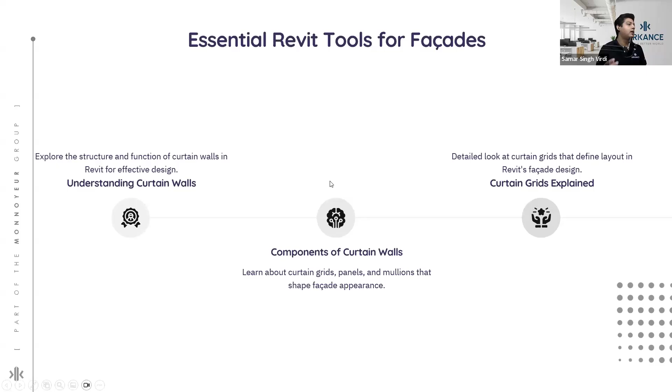And we can also have a detailed look at curtain grids that define the layout of the facade design. Other essential tools include panels and mullions. So the usage of both of them, understanding their role and how they can create a unique kind of a design. We have adaptive families in Revit as well. So adaptive families can be utilized to create versatile and dynamic facade elements.

Apart from adaptive families, we also have pattern based families. So these are pattern based surfaces that can be followed. We can create pattern based families that can be then applied to divided surfaces. Today we'll be going over this in a short demonstration as well. So exploring parametric modeling techniques. First is creating reusable and flexible panels. So there will be techniques to design panels adaptive to various projects, enhancing efficiency and versatility.

Dividing surfaces. So if you might know conceptual massing in Revit, you would know that we can divide a particular surface. Once we do that, we can easily use that divided surface to create complex forms. And finally, once we've used adaptive families, pattern based families, and done a divided surface, we can also control those patterns. So, strategies for managing and manipulating patterns within facade designs for aesthetic and functional benefits.

All right, so let's just go over some key design features of the Burj Khalifa. The architects are Skidmore, Owings, and Merrill. It is at a height of 828 meters above the metropolis of Dubai, and it is of course called the world's tallest building. It's a 162-story tower which combines local cultural influences with cutting-edge technology to achieve high performance in an extreme desert environment.

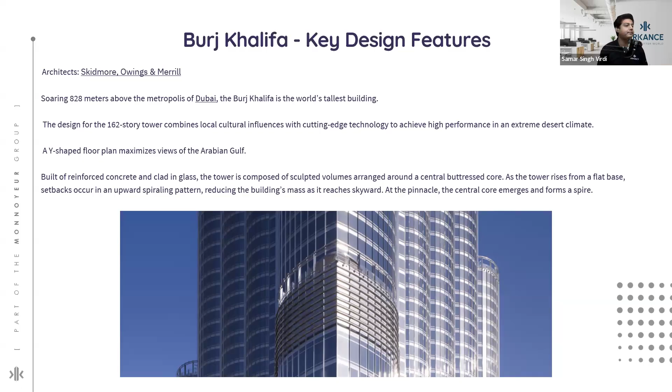So let's just look at the description that I've given in a 3D view. You can see the central core is going up and creating a spire, and we have this mass which is reducing till we reach the top. So the design inspiration is a certain desert flower which was the main source of inspiration for the planning. The tower is composed of three elements arranged around a central core. So you can see in this plan that here is a central core and we have three different wings from which the tower has been created.

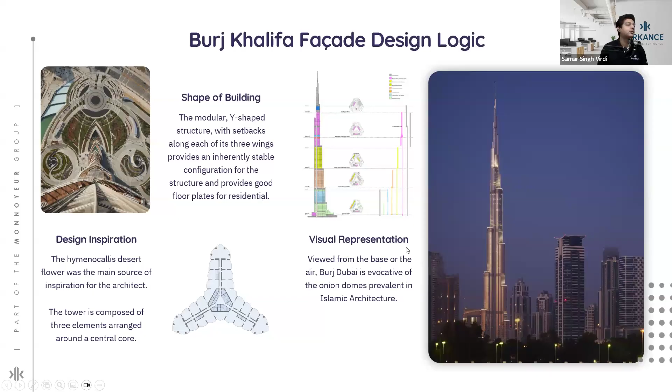The modular Y-shaped structure with setbacks along each of its three wings provides an inherently stable configuration for the structure and provides good floor plates for residential. Viewed from the base or the air, Burj Dubai is evocative of the onion domes also prevalent in Islamic architecture. These are some visual examples. So this is an aerial view. You can see the flower from which the plan was inspired. And this is a section comparing it to different buildings and towers throughout the world. And here you can see the particular 3D view.

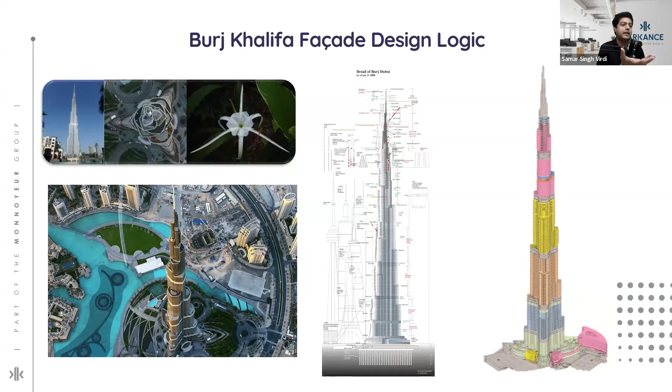Now you can see this particular color coding that has been done, and you will be able to notice that these colors actually signify the variation in the mass and the built form as we move upwards. So the lower base has more mass, and this pink part is reduced. So this is the exact strategy I'll be explaining to you within the software on how we can achieve this in Revit.

Before that, I would also like to talk a bit about other topics or tips that you might have to remember, especially for designing such structures. So enhancing model performance in Revit is also a great feature. Model performance can be optimized. So implementing advanced techniques to enhance Revit model performance for facade projects. Once we've created a model, we can easily optimize it, do some analysis and see what is working and what is not working. We also have effective scheduling because each and every component of the building is divided into an informative item tag. What we can do is we can use effective scheduling to actually create a good timeline which the project can follow.

Detailing is also very important, and Revit provides multiple annotation and documentation detailing features to do that for you. Techniques to enhance performance. Of course, once we've modeled the model, then we can use performance optimization to enhance the performance of our building. Impact of documentation. Again, if we've done the detailing, understanding how documentation impacts project workflow and overall facade design quality. Finally, we also have collaboration in facade projects. So fostering collaboration among teams to enhance the documentation and modeling of facades. This can be done through internal Revit based collaboration, or you could also use the Autodesk Cloud.

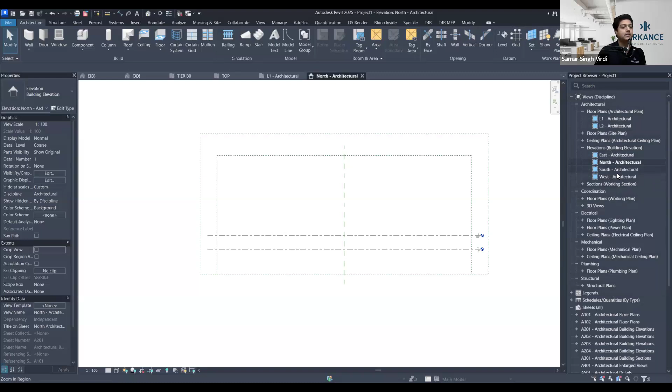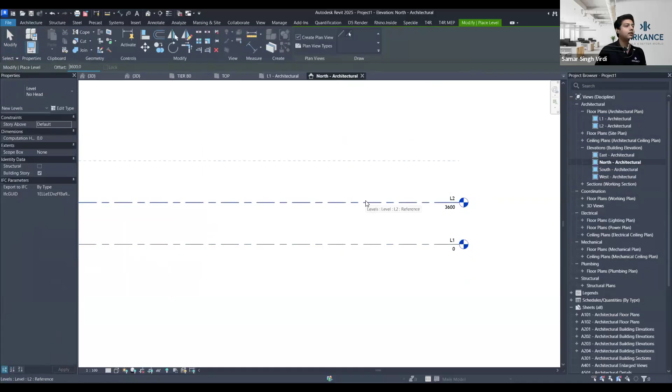On top is my command ribbon, which has all my commands. So commands according to the multi-disciplines that we have. And on the right, we have the project browser from where I can visit multiple views and sheets that I've created. All right. So right now we have L1 and L2 at a distance of 3600 mm. Let me just go to architecture tab, level, and create some levels. So 3600, and I am using the pick line tool to actually just click on the previous level to be able to create levels much easily.

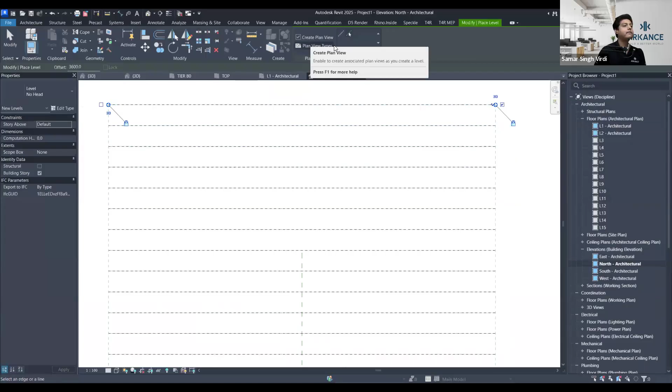So like this, I can just go ahead and start creating multiple levels. As you might be able to see on my right, the project browser is automatically adding the levels. So floor plans are automatically being added. This is because I have checked this on my command ribbon, create plan view. So like this, we have easily created about 15 levels. I think that would be enough for this example.

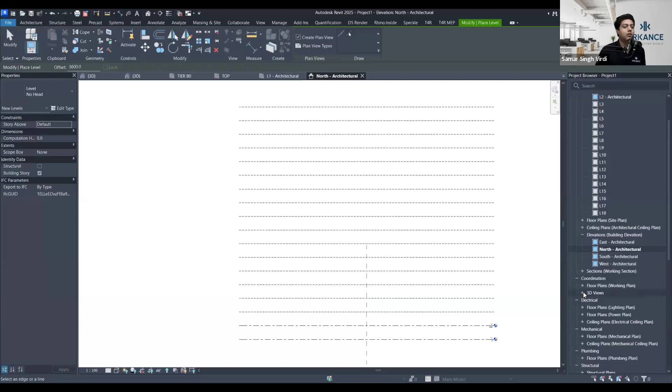Now what I can do is I can navigate to my 3D view, which again I'll do on my project browser. So I'll go to 3D view, 3D, and you can already see these levels. And to now create a mass and actually begin modeling a skyscraper, I will go to massing and site. And here I will click on in place mass. Revit will just give me a warning that it has enabled the show mass mode, which we of course want. So I will just close it and I can just name my mass. So I will just name it to building 1.

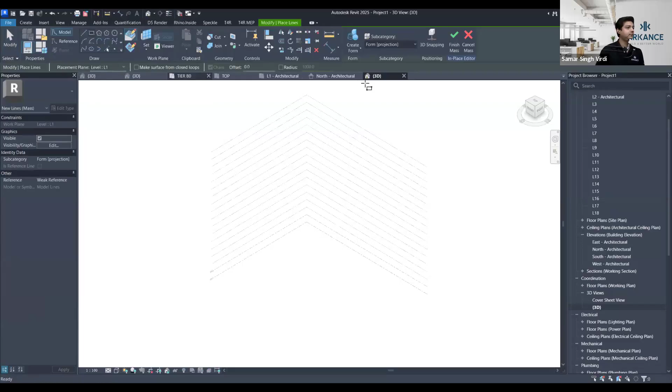And you see we have some modeling settings available here. What I will do is I will select a rectangle tool and make sure my placement plane is level 1. Next, I could also model within my 3D environment, but for accuracy, I can navigate to L1, which is my level 1, and place a rectangle here. So about 31 meters by 31 meters is good.

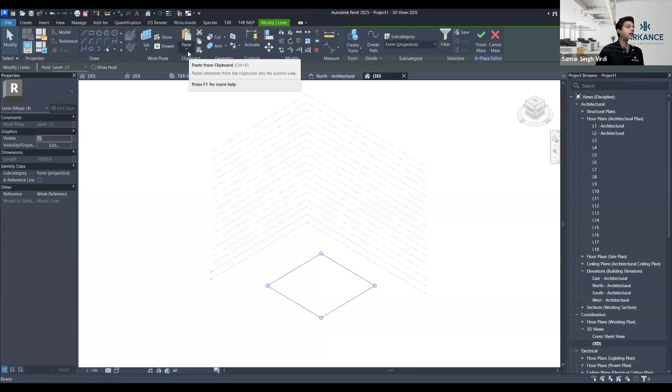You can see I have placed this particular rectangle. Next, what I can do is I can easily create more shapes on each of the levels, or I could also copy this shape. So let me just go to copy and then I will click the paste drop-down menu where I will select aligned to selected levels. By clicking this, I'll have this pop-up window which will ask me which level I want to copy this rectangle to. So that would be level 18. And you see the rectangle has been copied to the top level.

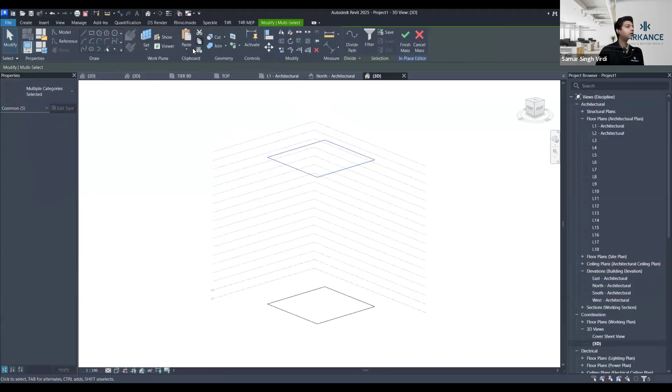Now what I will do is I will also create another copy. So again going to my clipboard in my command ribbon, I will align to selected levels and I will create the copy on level 10. But for level 10, I will actually use the rotate tool, which is in my command ribbon again. The shortcut for rotate is RO, and I will go ahead.

Let me just select the rectangle first. I will click on RO and I will now just rotate this to 45 degrees. As you can see, I can enter the value of 45 and it will be rotated to 45 degrees. So here is a double rectangle that was created. I will just delete this one. And you see, now we have three simple basic shapes that I've created.

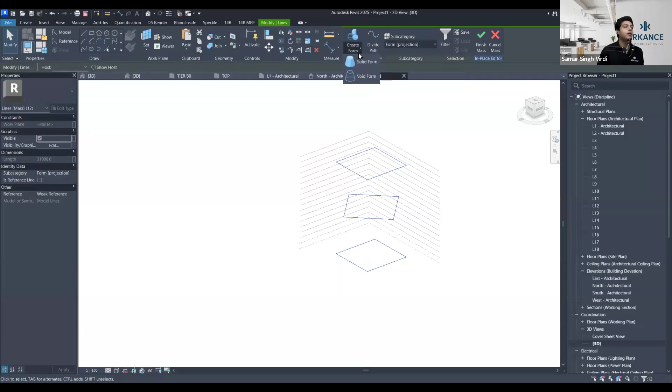And what I can do now is select each of these shapes and go ahead and click on create form. There are two types of form, solid form and void form. We currently need the solid form. So I will click on solid form, and as you can see, we have a very interesting geometry with us.

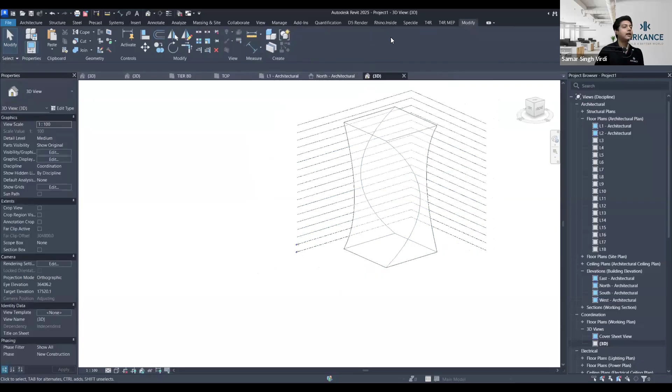Of course, when I'm modeling a building, I would follow the drawings and we would have a much more accurate building according to our requirements. But for now, let me just finish this mass. I clicked on the tick mark on the command ribbon, and now you can see I have this mass ready with me. Okay, so this is a conceptual mass, something like the geometry that we create in SketchUp.

Now, how do we actually convert this into a building? This is a great feature that Revit has. I can navigate to massing and site, and you can see I have all these settings under the model by face category. And very simply, I could choose whatever I want. So let's say first I want to create some floors.

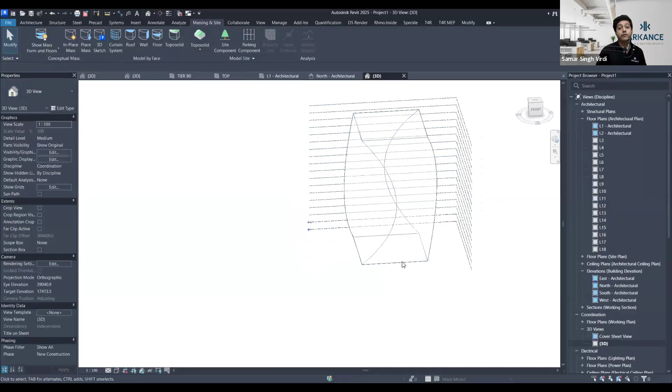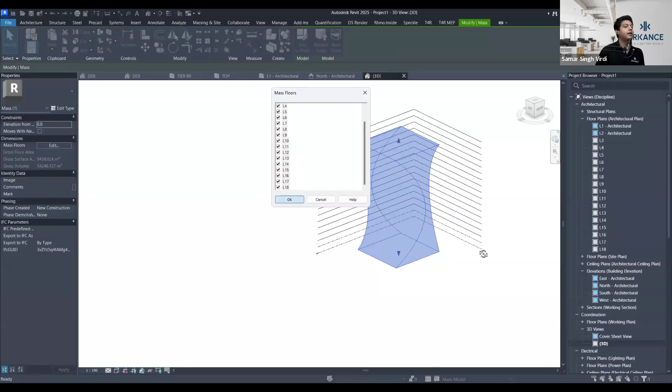I will select the mass and then I will go to mass floors. Whenever you click on a mass, you will get this option. I'll select mass floors, and then I will select each and every floor. So I've checked all the floors and I will click on OK. This will automatically create mass floors according to the geometry of the mass on each level.

Next, I can go to model by face in massing and site and click on floor. Now, very simply, I can choose these mass floors to actually convert them into a floor. You can see I have the generic 300 floor family loaded. This is okay for now. I could simply select them all and click on create floor. Now you see that a certain thickness has been added to each of the levels.

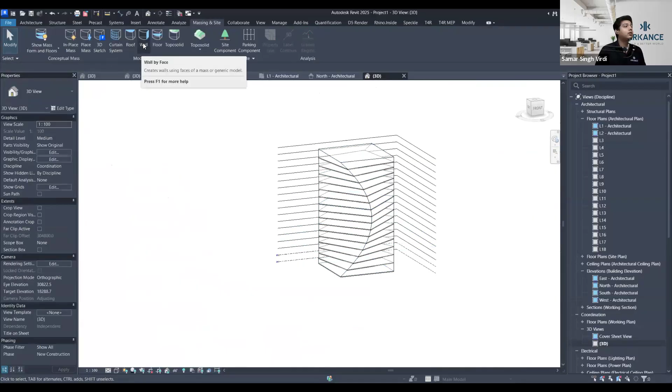Further, I could also add either a wall or a curtain system. Both have similar functionality, so let's just go ahead with the curtain system. Clicking on curtain system in massing and site model by face, I will now start selecting the surfaces that I want to create the curtain system on. Those would be the four sides of this facade. And let's say I have selected this building.

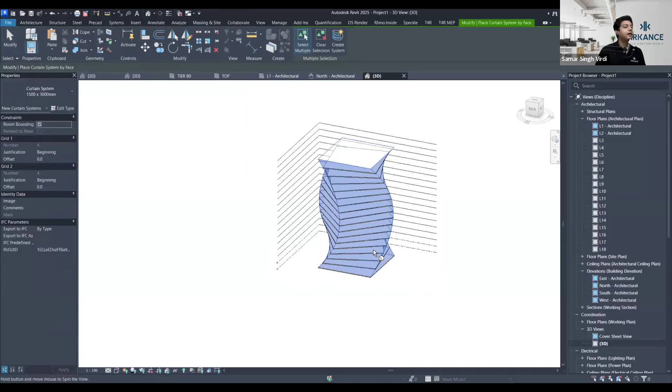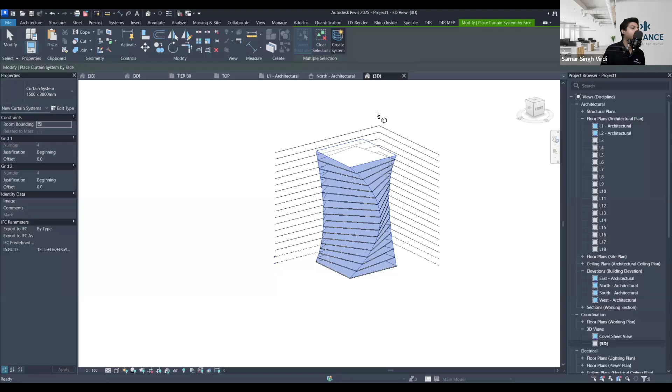And now maybe I could also change the settings. For the curtain system, I have one family loaded. I could change the justification and offset of grid 1 and grid 2. And now I will just click on create system. It will take a few seconds. And now you can see that Revit has actually converted that mass surface into a curtain system.

So now you might see it hardly took me any time to actually create a very simple conceptual massing and convert it into a building. I can also press Tab to select multiple objects. So I could select one system panel, or I could select the entire mass, or I could also select the floor. Further on, we can easily go ahead, create the changes that we want, maybe change the curtain system and change the types of panels that we require.

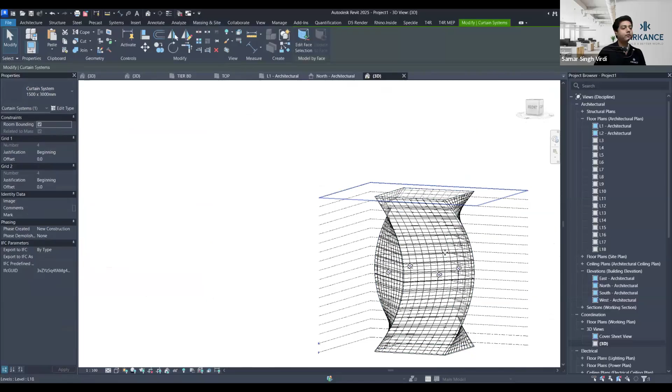Let me just navigate to a level, and you can see we have this level with all the detailing in plan view as well. So this was a very basic introduction to advanced massing actually. And this I wanted to present particularly so that you can understand what we've done in the Burj Khalifa model. Let me just save this file.

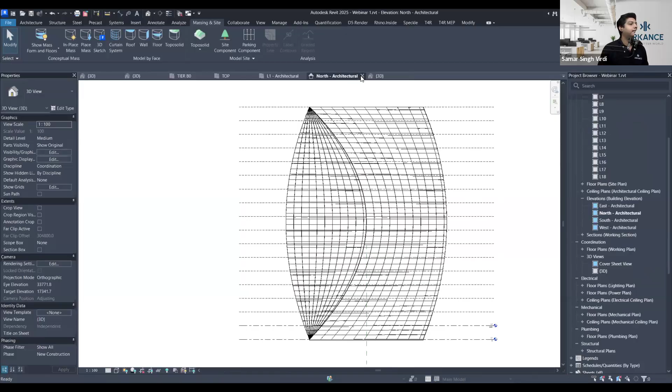All right. So now let's just move on to another demonstration, which will be actually of creating a parametric surface and adding pattern based geometry into that surface. So again, I will go to new, create project. I will choose the metric template. All right.

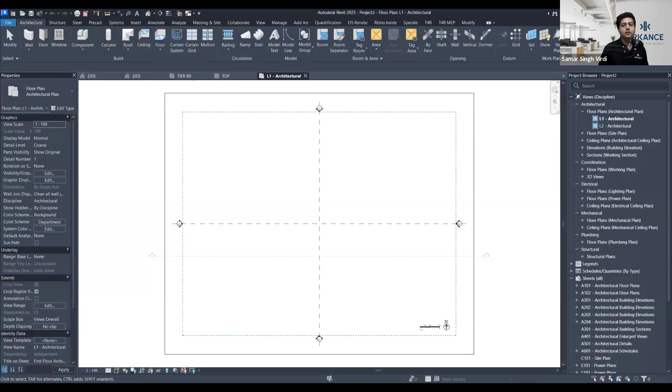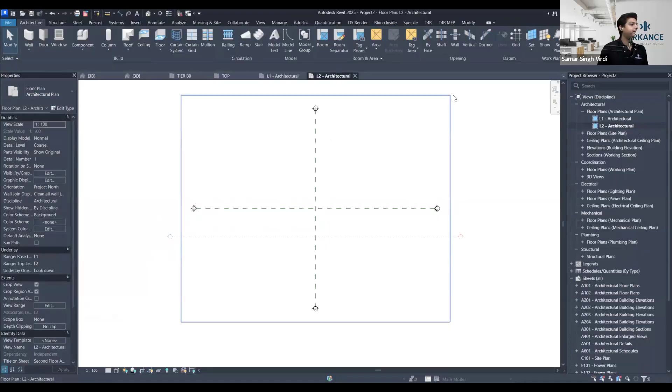Again, I don't want these extents. This is a new feature that has been added in Revit 2025, which is quite convenient. But for this example, I do not require this. So I will turn this off using extents in my properties tab. And I will also delete these scope boxes. I will navigate to level 2. Here also I will repeat the same. Yeah.

So that was one way of creating a mass. Let me now show you another way. I will again go to massing and site, in place mass, and just name the mass whatever I want. And now instead of using a rectangle or any other shape, I will actually use this point element. Point elements are quite useful. You'll understand now in just a few minutes. What I did is I just selected the point element and I have started placing these points onto my level 2.

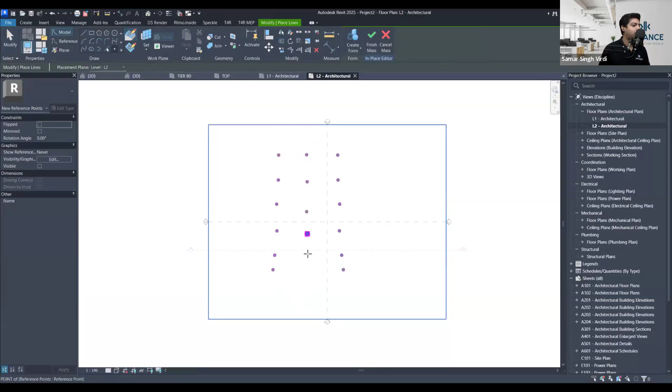All right, so I have created a sort of an imperfect line. Let me just mirror this onto the other side. Mirror again, I'm using the command MM to select. And let me just create a middle as well. So this can be done precisely as well. Maybe I just want one point and then I could copy and use ortho to do a precise placement of these points. But right now for this example, we do not require that precise modeling.

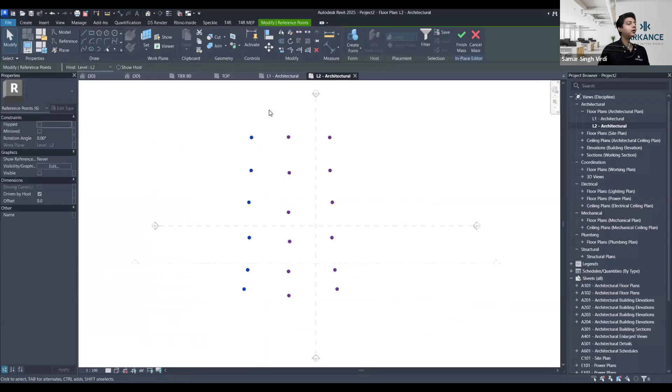All right, so once we've placed these points, I will now connect them using the spline tool. And make sure that when we are connecting, I will actually just connect these particular lines vertically. So I've selected the left hand side. I will go ahead and click on spline through points. This will create a line for me. I will repeat this. So here and here as well.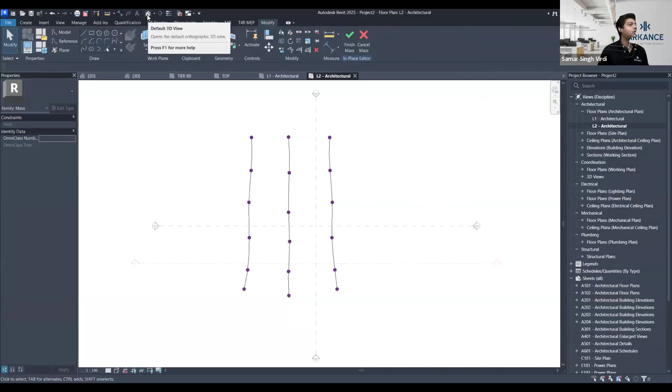Let me just navigate to my 3D view. I could navigate using the project browser, or I could also go ahead, click on this house icon on top in the quick access bar and open up my 3D view. So yes, I've modeled it correctly. We have straight lines. Now, before actually converting this into a mass, I will also convert this into a reference line. That is actually useful because it converts the line into planes that we can further work on.

So to convert this into a reference line, I will do nothing but just go to properties and click on reference line. So I just take the reference line and you can see two planes have been added on both of the ends. Similarly, I will do for the other lines. And now I can select all of these and go ahead and create a solid form.

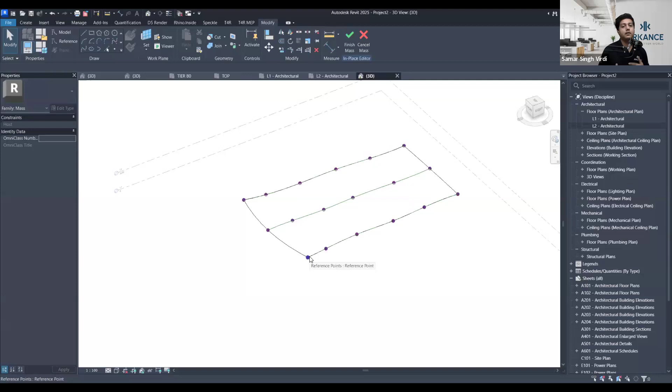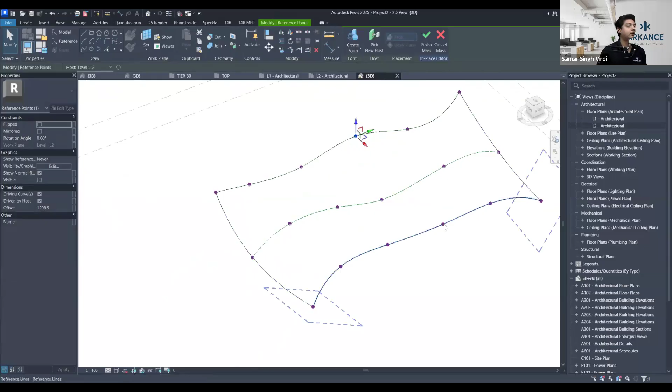So if I had not made these into reference lines, these points wouldn't have been available to me to manipulate further. But now I can easily select one point and actually just manipulate their position on, say, the Z axis and actually create something interesting. So let's say I want a complicated surface, something like this. All right. So I think this is enough for one example.

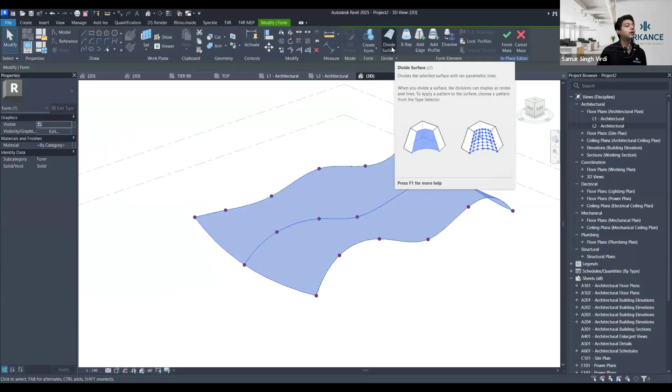Next, what I will do is I will select the surface. So how did I do that? I clicked on the edge of the surface and you can see here it says divide surface. For that, the shortcut is 2 times forward slash. So clicking on divide surface, it will actually use the surface geometry to divide it into a grid. But I will not stop here.

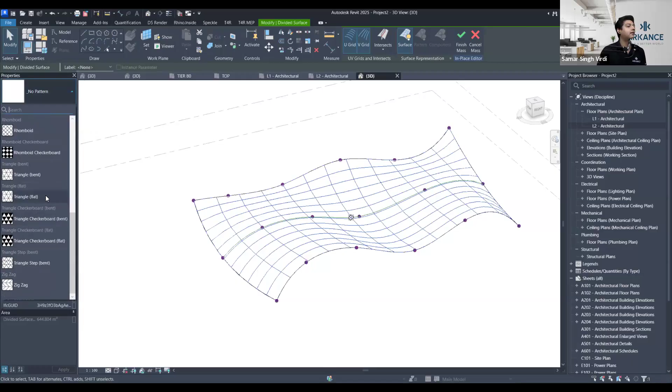I will also adjust the pattern of this surface. So right now, as it says on the left hand side in my properties tab, it says no pattern. What I will do is I will go ahead and I could choose any of the patterns that I want. But right now I will choose this triangle flat pattern. So you see the surface has been divided into triangles.

We also have some other functionalities in my properties tab. So you can see the U grid and the V grid, which are the vertical and the horizontal axis for this surface. I will change this fixed number to, let's say, fixed distance, and I will change the V grid as well to fixed distance, and the distance I will provide as 900.

Clicking on apply will actually change the surface for me. Now you see we have much smaller triangles going throughout the surface. So now I can easily click on finish mass and this has been created.

But right now, this is again just a conceptual mass like we studied in the previous example. How to actually give it some 3D geometry? To do that, I will now create an adaptive family, an adaptive pattern based family. So let me just go to file, new, and I will click on family instead of project this time.

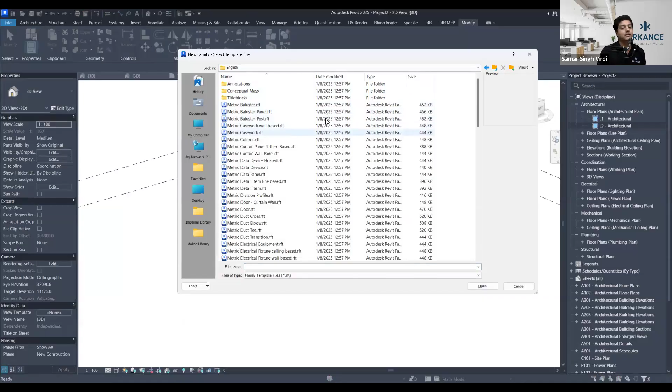Here I have my Revit library, which has a lot of templates that we can work on. But let me just navigate to metric instead of imperial. And here you can see we have door, we have furniture, but right now what we require is metric generic model pattern based. So this is what I will open and this will give me this particular template.

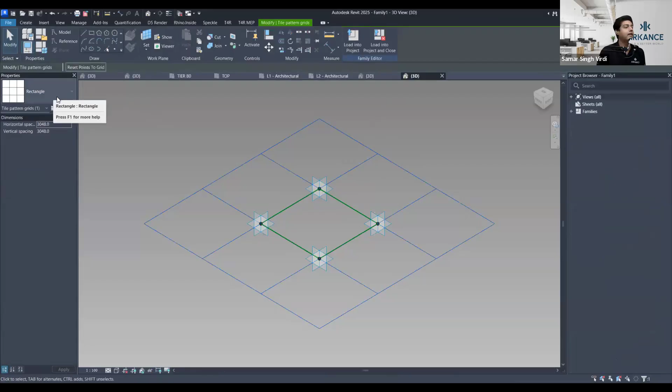Now to change the pattern of this template, I can simply click on this blue line grid, and on the left hand side, again, I will have the properties tab. Here I can go to my triangle, which I've used. And now you can see we have reference lines, we have points already placed with us, which are adaptive points. So adaptive points will basically adapt to whatever points are available on the surface. This is what makes this geometry adaptive.

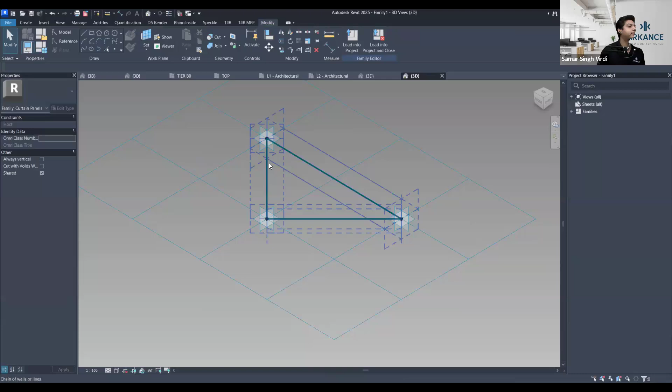Let me now just create a 3D geometry using the sweep tool. So for that, I will again use a point element. I will place this point element anywhere on these green lines, which are my reference lines. So let's say I want to place it here, and you can see after selecting the point, I have a particular plane on which I can draw.

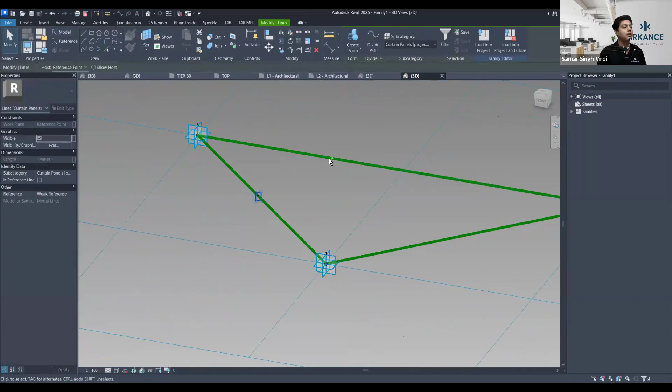On this plane, I will go ahead and choose rectangle and easily just draw a rectangle. Of course, precise dimensions can be followed once you're actually working on a project. And now I will select this rectangle, and by holding control, I will also select these reference lines. Next, I will go to create form and click on solid form. So you can see that it has created a frame for me.

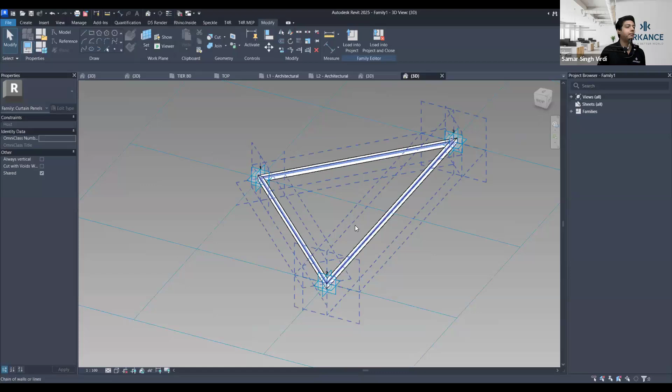Similarly, we could add maybe a glass panel between this. So I can choose maybe a surface. How did I do this? I just selected the reference lines and created a form again. And for the material, I selected this surface, went to my properties tab, and I have the material option. So here I can just use glass. All right, I think, yes, it has been selected.

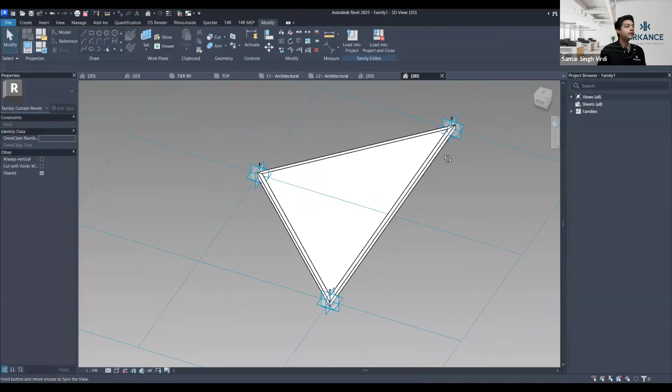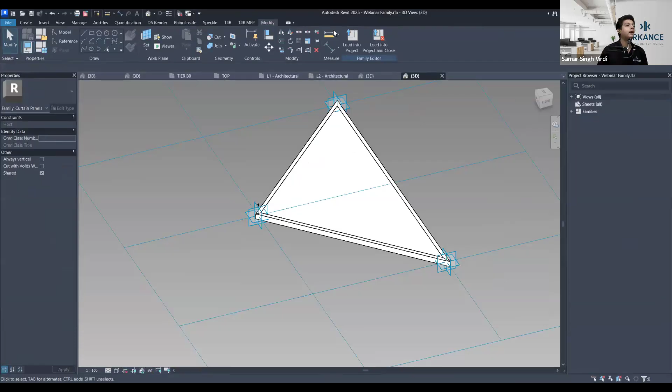Now to actually take this particular family into my project, which is this surface project, first let me just save this file. So I will name it as... If we have the project and the family open in Revit, I can just click on load into project and it will show me the projects that I have open. So I will just click on project 2 and the family will be very easily imported into the project. So this is one way. The second way is you can save the file and import it later using the insert tool.

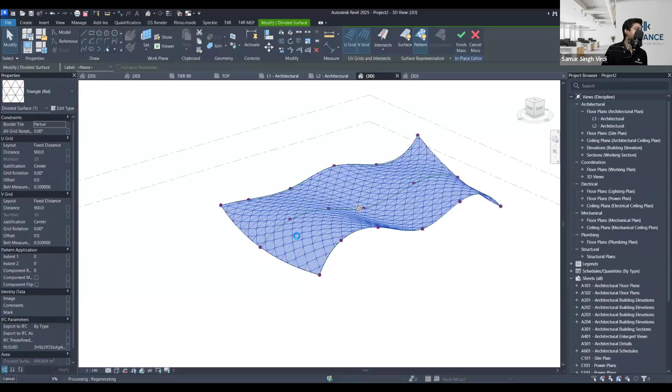So now I can go ahead, double click on the mass, then select the surface. Now going to my pattern, I can simply go to the drop down and choose this webinar family. By clicking on this, it will take not minutes actually, I think 30-40 seconds to generate that webinar family onto my surface. Yes. So now you can see the particular geometry has been added to the surface. I can click on finish mass.

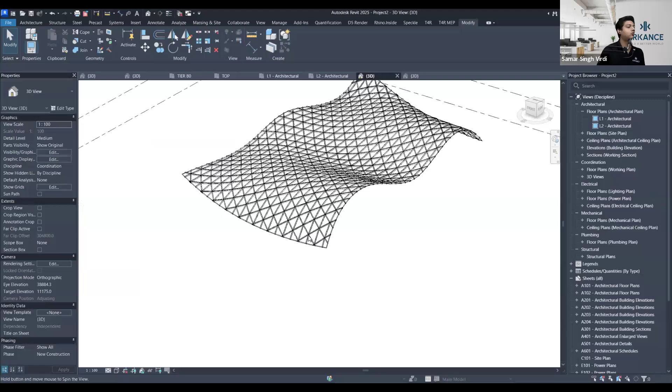And you see that we have a very parametric surface available to us. This can be used in roof structures or whatever kind of geometry you want. We also have some additional settings. All these are covered extensively in the training sessions and courses that we undertake.

So you can see right now I have border tile as partial. If I want this to be complete and not cutting this geometry, I could choose empty instead of partial, or I could also choose overhanging. So empty will actually just delete these edges and give me just clean triangles. I'm so sorry.

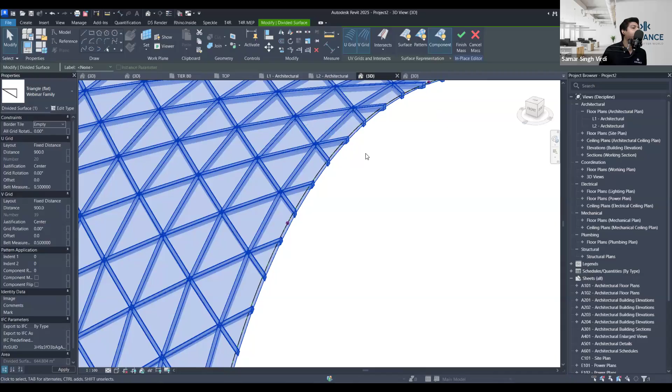Yes. So you see, this was one example. Now, why did I show you these examples? This is to make you understand and give you a bit of clarity that you can create masses of any skyscraper that you want, divide that surface, and then add whatever pattern-based family that you require to create complex facades. This is right now horizontal, but of course the same thing can be done vertically as well. And a great comprehensive facade can be made.

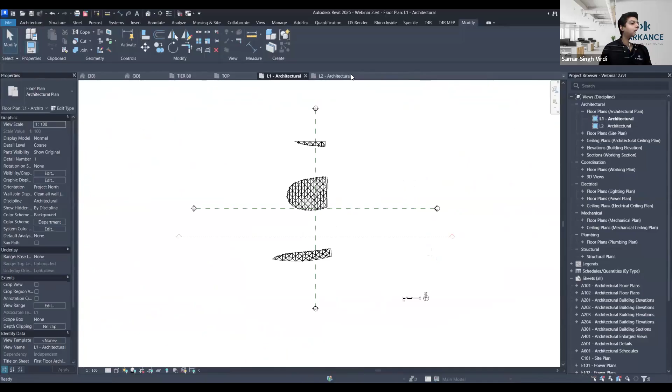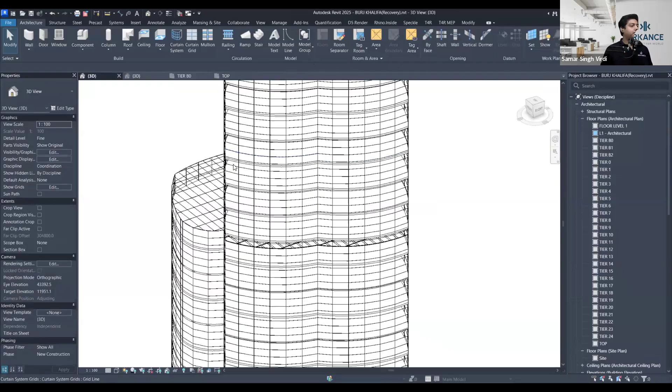I'll just save this file as well. All right. So let's now get into the modeling of Burj Khalifa. I'll just navigate to a 3D file that I have opened. So this is the 3D model that has been developed within Revit. As you can see, when I zoom in, it has a curtain panel system all around. And of course, it follows the exact geometry and massing of the original building.

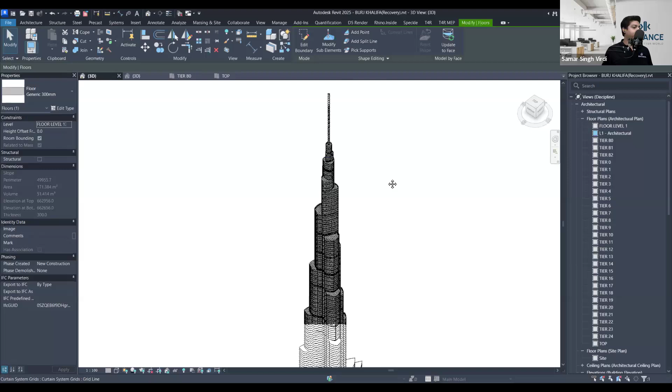And we also have different mass floors with us. So how did we approach this? We approached this using conceptual massing and then using model by face to convert that conceptual massing into a building geometry. Let me just break down and give you an example of how this can be approached. So first of all, I'll just navigate to my site plan and turn this on.

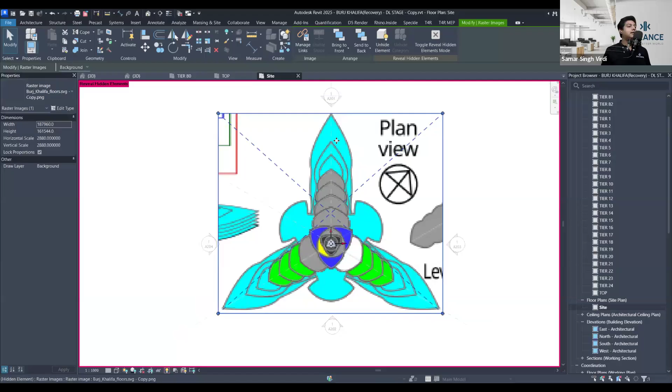I had imported this plan view, and this is actually a typical plan view that consists of the geometry of all floors within the Burj Khalifa. You can see this is the top and this light blue is the base. Next, I used detail line, which is here in the annotation tab. Of course, you first have to import this image and scale it according to the real scale of the building. Then we can use this detail line, the shortcut is DL, to start tracing upon this.

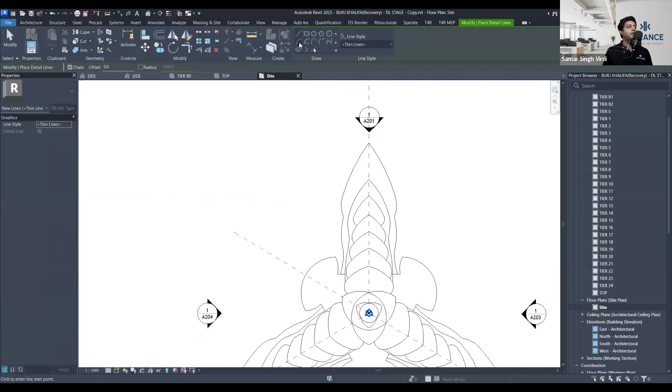Let me just turn this off and show you. This was the traced result, which I did on the site level, and you can see that this is exactly how the plan was. It didn't take me much time because this was just tracing. Let me navigate to Annotate, DL, and you can see we have these drawing tools here. The most used tool on this plan was this curve: start, end, radius arc. This was used a lot to create these geometries.

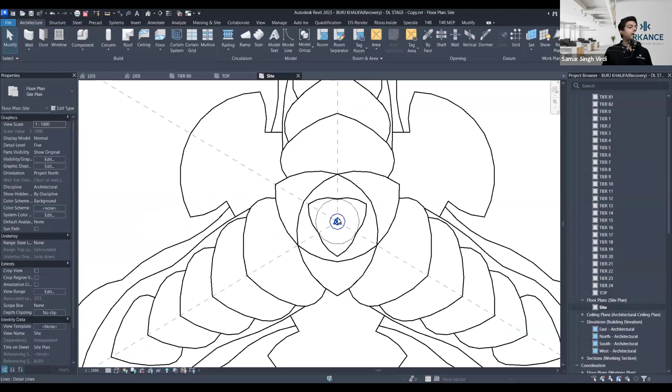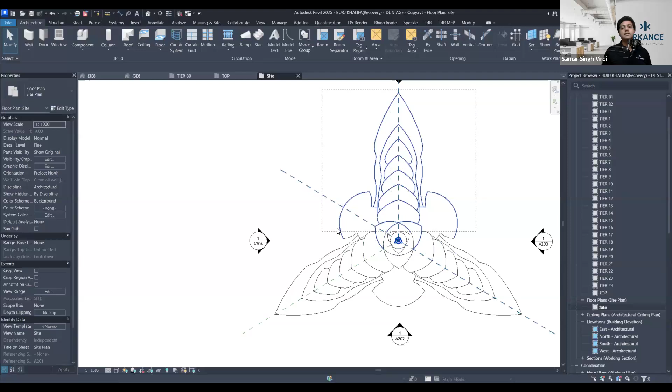Next, there was one more feature that I used in my architecture tab, which is reference plane. I created three reference planes at an angle of 120 degrees, and this one I just extended. I traced this particular part of the model, the one highlighted in blue. Then I used the mirror tool to mirror it on this side, and similarly I rotated it and mirrored it on this side, because this is highly symmetric. With this, I finished this particular geometry.

Now, I've skipped the basic parts, which is the setting of levels. Whenever you open a Revit file, it is important to set the levels. Even for this, when I opened the file, I went ahead to set the levels. I had imported a section view of the Burj Khalifa, and I created multiple levels as per the section I had downloaded. After doing this, I had all these floor plans available to me,

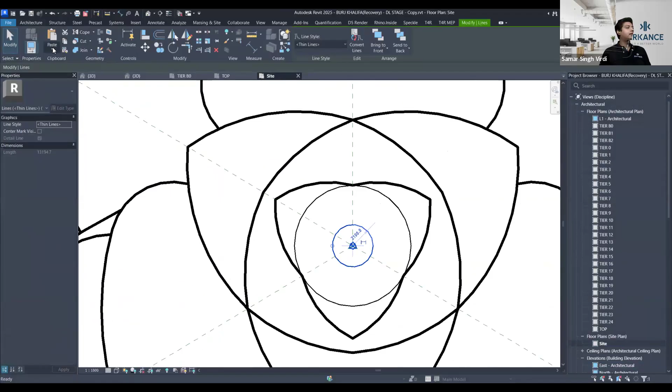and then I started to use these geometries on my site plan to copy. I selected the geometry, used copy, and then used Aligned to Current View, so I just pasted it onto my top. Similarly, I used these lines to start copying on each of the levels. Let me go ahead and show you.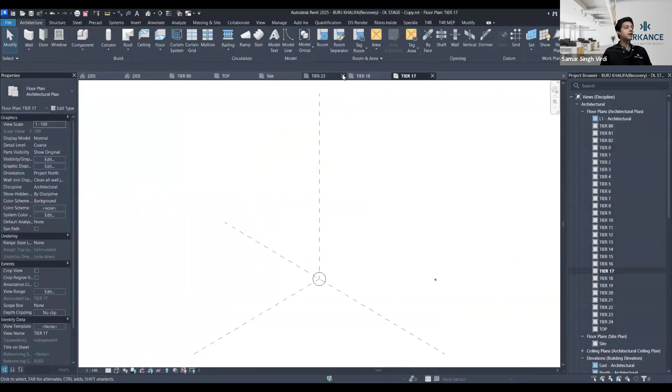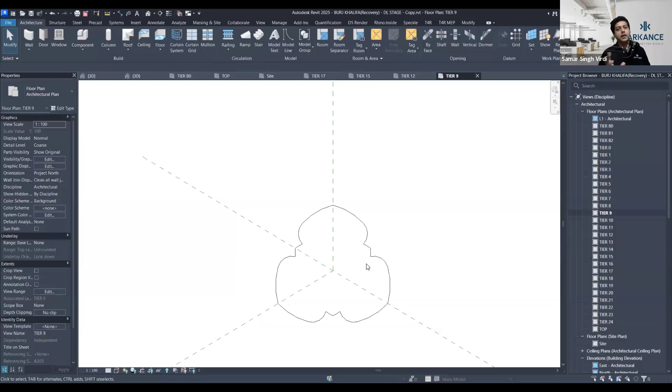Level 17. From the top till level 17, we just have this spire, so only two of these geometries were used. Then I went to level 15 and created this geometry. On level 12, I expanded it to this. Level 9, this. Of course, it took me a bit of time to understand and break down the geometry of the building, but once that was done, it became quite easy to use that site plan and keep adding these lines. So it might be on your mind: why am I actually doing this?

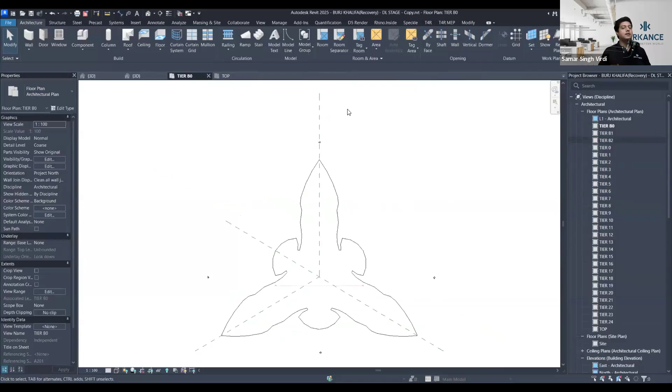So once we've actually added these lines, the next part was to, let me just close these tabs. The next part was to create forms just like we did in conceptual massing and start extruding them. So one example for that can be that I can choose the top, then I could go to Massing and Site, In-Place Mass, okay. And here I can use Pick Lines to use this particular circle. I can click on Create Form, and then you can see here I have this.

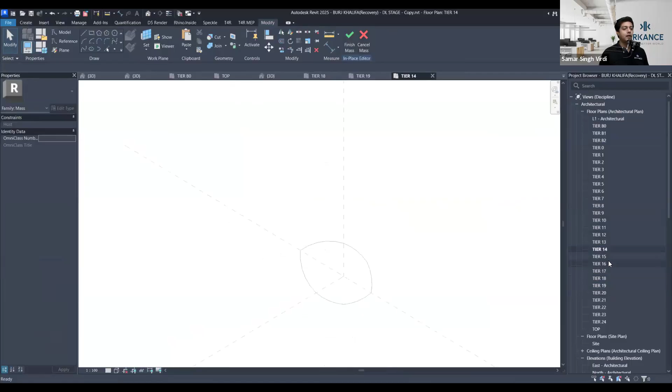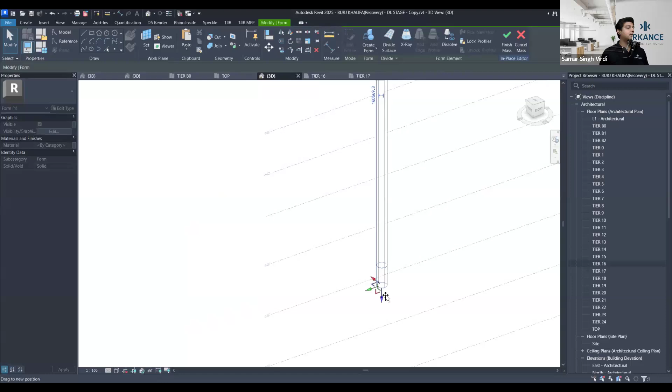So this particular geometry I then just extruded onto the level below. So this was, I think, level 18. So I extended this to level 18. Then I navigated to level 18 and I made sure that I do not finish mass, because all this is just one mass. That would actually help us to convert it into a building. Okay, I could navigate to level 16. I can extrude this as well to level 16. And you see, as I'm dragging it, it actually snaps to the particular levels.

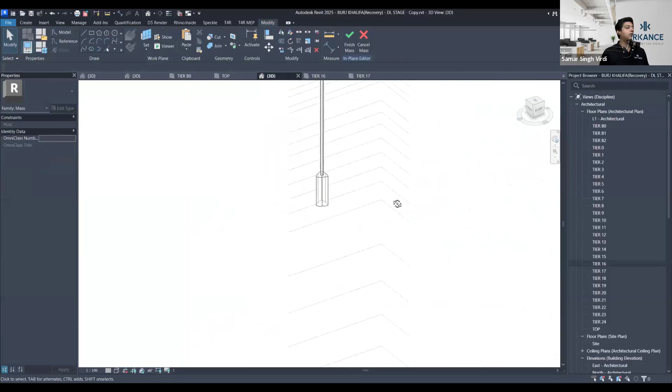So this is one. Then I used Pick Lines again, clicked on Tab to select all of these lines, and then again clicked on Create Form to have this geometry. This then I took over and extended it to the other level below it. And this was the top to bottom approach that I followed to actually just keep selecting these geometries and model my building. So this is level 14. I will again go to my 3D and I could do till this. So as you can see, slowly my form is being developed.

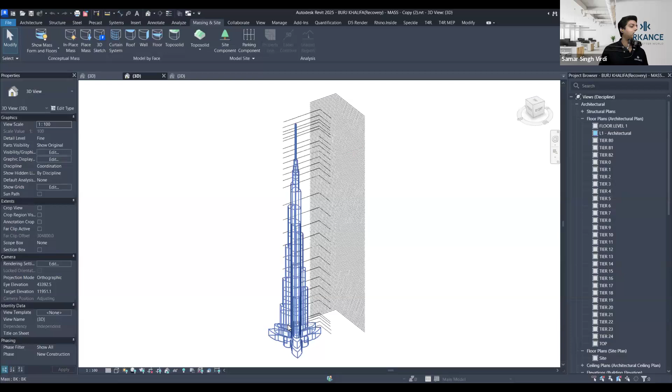So I used this particular method to actually achieve this mass. Let me just turn on the massing. So I'll go to Massing and Site, Show Mass. And now you can see I have this mass available with us. So the similar method I followed, going on each level and actually extruding it to the level below. This took a while because there were different levels. So let's say level 12, I extruded it to level 11 and so on.

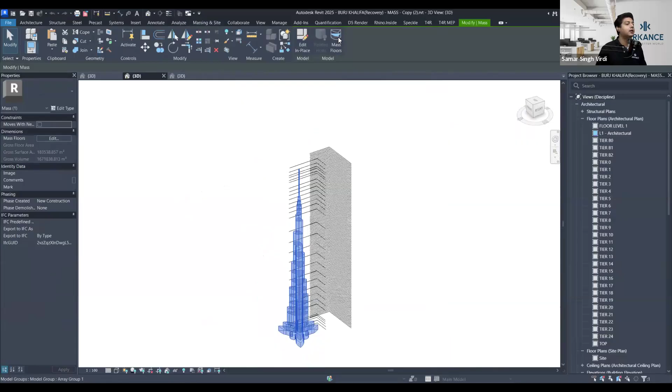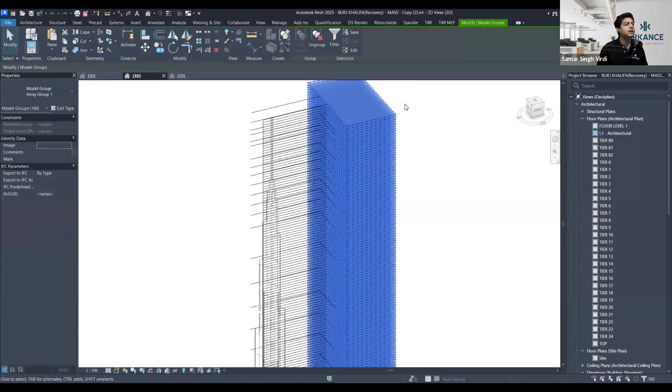Next, I used mass floors to convert this into a mass, and then I added 162 more levels after I had done mass floors to create the stories, because these were different levels. These were height levels that were used for the section, but I created another set of levels, total of 168, and those I used to create the mass floors.

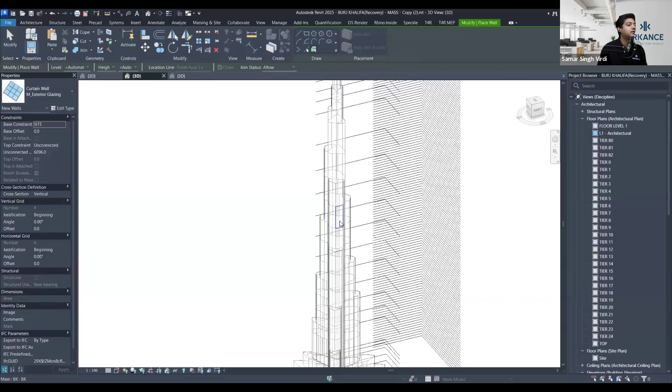And further on, let me just give you an example. I could either use Massing and Site, Curtain System, or I could also do Architecture, Wall, Wall by Face, and then go ahead and select exterior glazing on my properties tab, and then just pick face and start selecting all the faces. So hitting Tab, it selected all the faces for me. It will take a bit of time because this is a very large project. And what Revit is doing right now, it is converting all the faces of that mass into a curtain wall.

So if you want to break this down into steps, the first would be importing plans, then would be setting the levels. Further would be tracing the plan. Next, keeping the plan and copying those geometries on different levels. Finally, using Create Form to create that mass, and next would be converting that mass into surface and mass floors. So in about 5 to 10 steps, you will be able to create a geometry something like this.

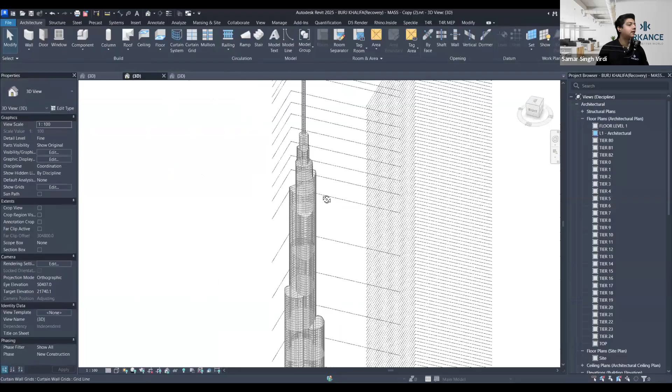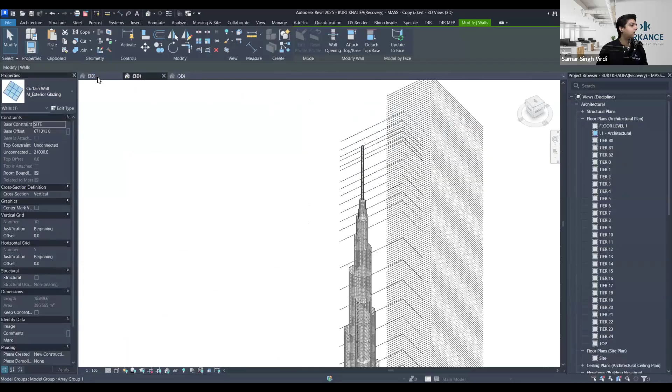So now you can see that it has converted all these faces into a curtain wall system. Further, we could detail it, detail the facade, adjust it however we want. Maybe we want to change anything in the curtain wall. I could go ahead, use this properties tab and change it according to my liking. So this is the final outcome. As you can see, the floors have been divided, the thickness of the floors has been given, and the mass has been converted into a facade.

All right. I hope this breakdown was helpful, especially for the ones who already know Revit. They would have understood this better.